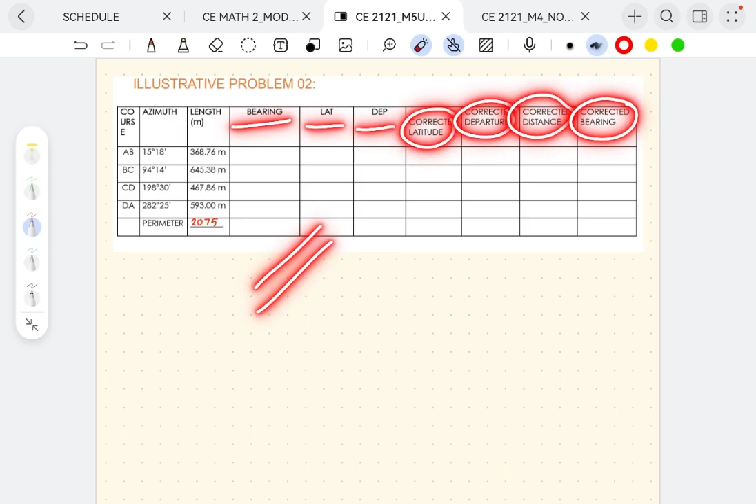The first thing we're going to do is fill up this table, identifying the bearing, latitude, departure, corrected latitude, corrected departure, corrected distance, and corrected bearing, based on the given data.

We can already solve for the perimeter by summing everything up, which gives us 2075. But before proceeding to solve, I usually like to sketch or roughly graph what is given in our data.

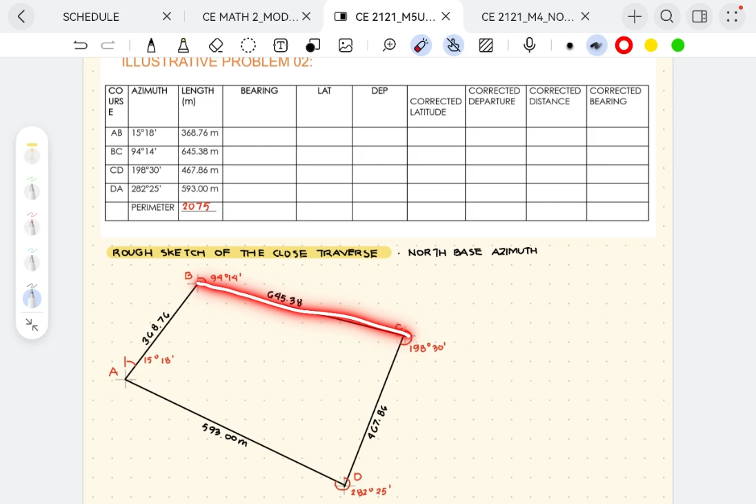We have line A to B with an azimuth from north of 15 degrees 18 minutes. Then from there, we have B to C with an azimuth of 94 degrees 14 minutes, and C to D and D to A with their respective azimuths. I've also indicated the measurement of the lines.

After roughly sketching the given data, we have to identify the bearing of each line. So what is the bearing of line A to B? Since this angle is already given as 15 degrees 18 minutes, we just need to know the direction. From here, this is north going to east, meaning the bearing for line A to B is north 15 degrees 18 minutes east.

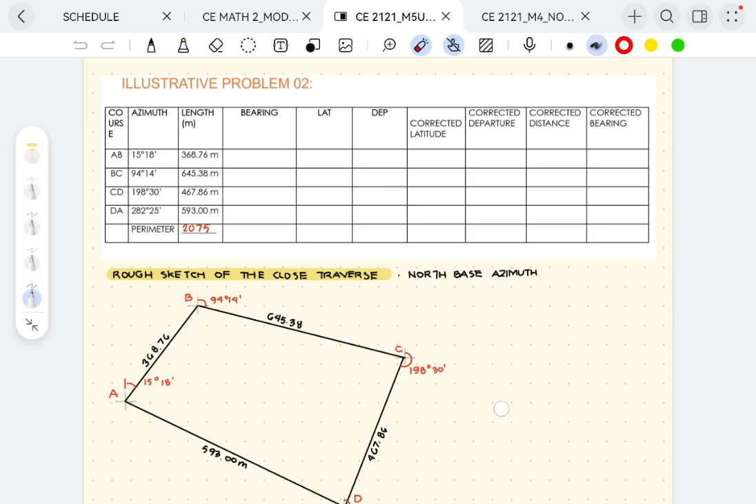This is your line A to B with a given bearing of 15 degrees 18 minutes north going to east.

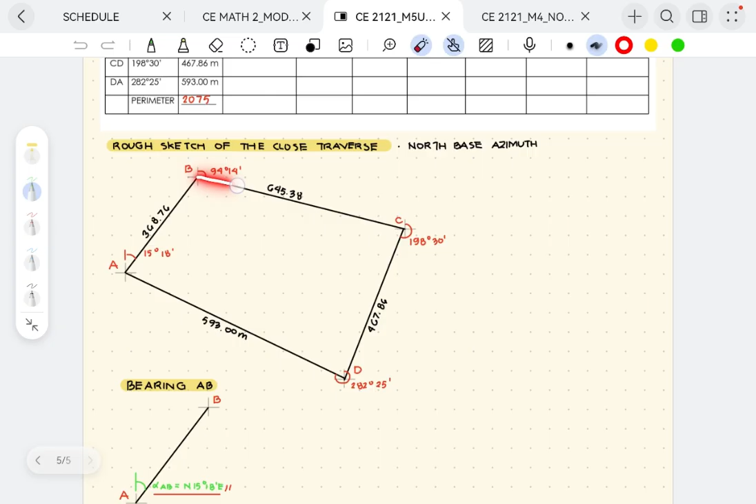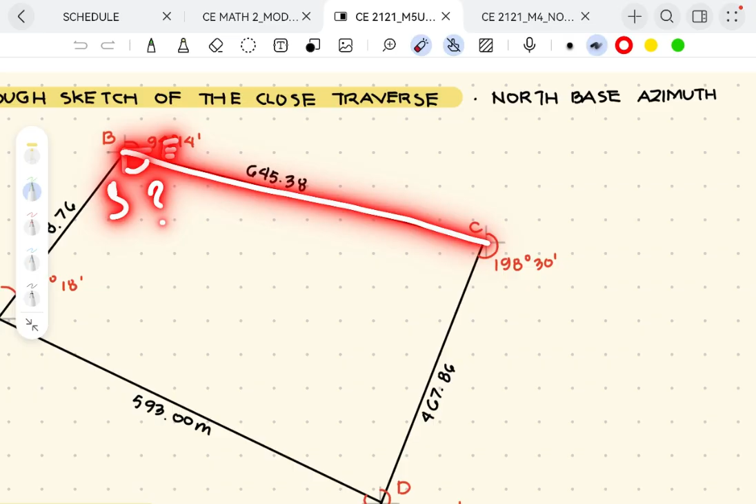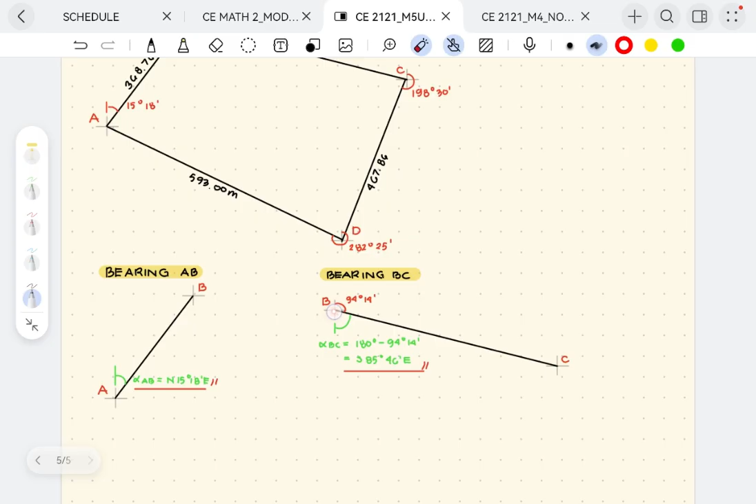Now what we need to identify is the bearing of B to C. As you can see, it is situated somewhere between south and east, so the angle should come from here. Let us make another diagram for line B to C to properly illustrate the bearing of B to C. In order to identify the angle from south going to east, we simply subtract 94 degrees 14 minutes from 180 degrees.

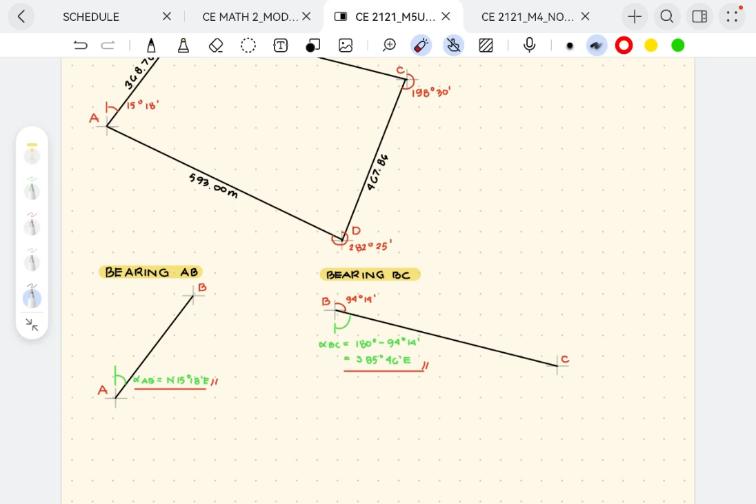So it's 180 degrees minus the angle 94, and we'll be able to solve for the angle here. The answer for bearing BC is south 85 degrees 46 minutes going to east.

For line C to D, I isolated the line again. What is the bearing of C to D? As you can see, it's already between south and west, meaning the direction for the angle is from south going to west. To identify this angle, we just subtract 180 degrees from 198 degrees 30 minutes. So the answer for the bearing of C to D is south 18 degrees 30 minutes going to west.

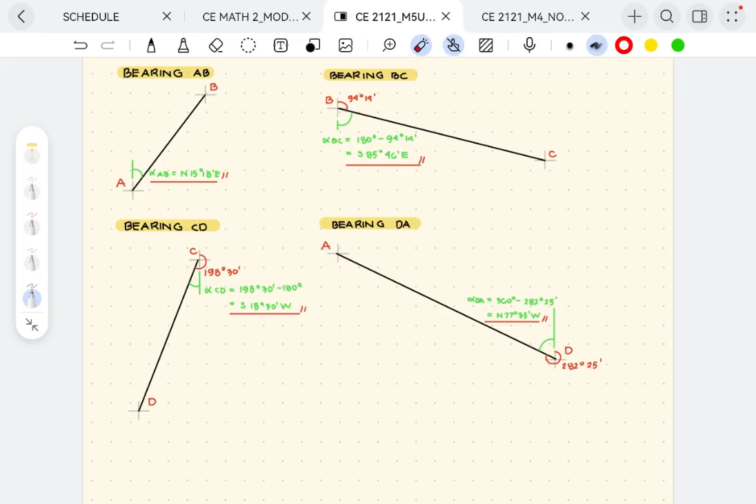The last bearing we need to identify is the bearing of line D to A. Here is your line D to A, and we need to identify this angle in order to identify its bearing from north going to west. We subtract the given angle from 360 degrees to identify the angle inside: 360 degrees minus 282 degrees 25 minutes, giving north 77 degrees 35 minutes going to west.

Next, after solving and writing the bearings in the table, we have to find the latitudes of AB, BC, CD, and DA.

So here I would make a rough sketch of line A to B first. This is your line A to B, and this is your latitude, this is your departure. Latitude is always the vertical distance, and departure is always the horizontal distance. As you can see here, we can consider this a right triangle, and we can solve for the latitude and departure using cosine and sine.

Let's first identify the latitude. If this is your angle, using cosine means we divide the adjacent side by the hypotenuse. The adjacent side here is your latitude, and the hypotenuse is 368.76, giving us a latitude of 355.69 meters. For the departure, we use sine, since sine is the opposite side divided by the hypotenuse, giving us a departure of 97.306.

The next thing we need to identify is the latitude and departure of line BC, which are shown here.

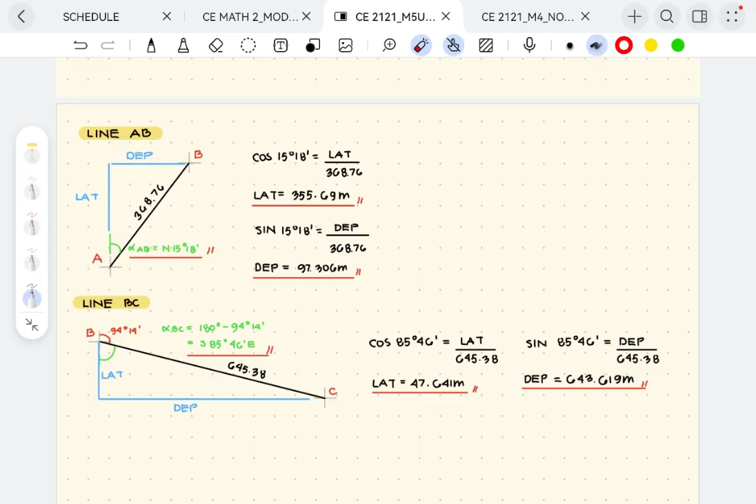To cut the video short, I've already solved for the latitude and departure of line CD and DA, still using cosine and sine, and considering these as right triangles.

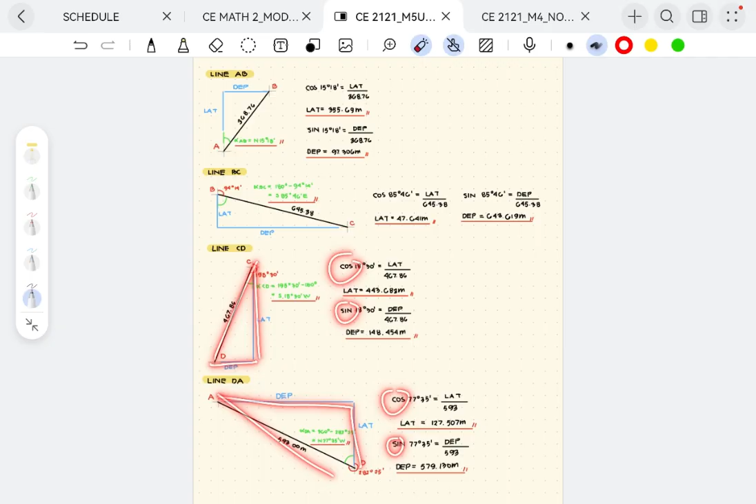After writing the latitudes and departures that we've computed in the table, the next thing we need to do is sum the latitudes and departures. So here we have 355.69 minus 47.641 minus 443.683 plus 127.507. So here we got negative 8.127.

As you can see, I used the sign convention. I included it there in the computations of the summation of latitude.

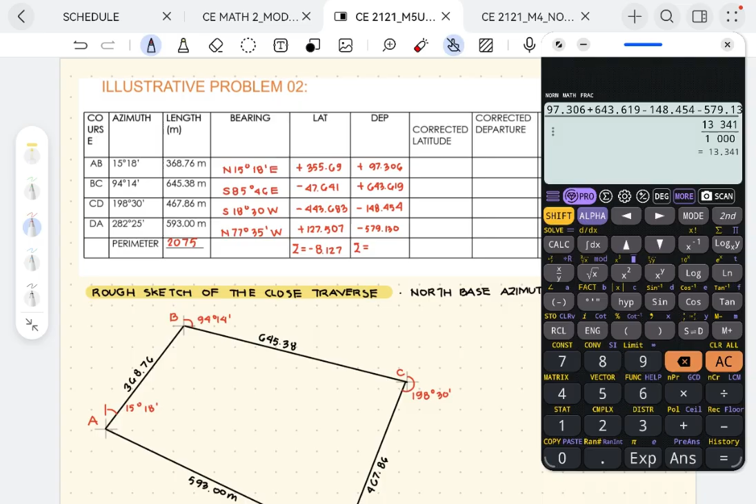Let's do the same thing for departure: 97.306 plus 643.619 minus 148.454 minus 579.13. So we got 13.341, or 13.341 positive.

13.341. So what does this negative and positive mean? The negative one means it's insufficient, the computed latitudes were not enough. Here, it's positive, meaning we have an excess in the computations of our departure, or the departure and latitude exceeded the computed lengths and angles.

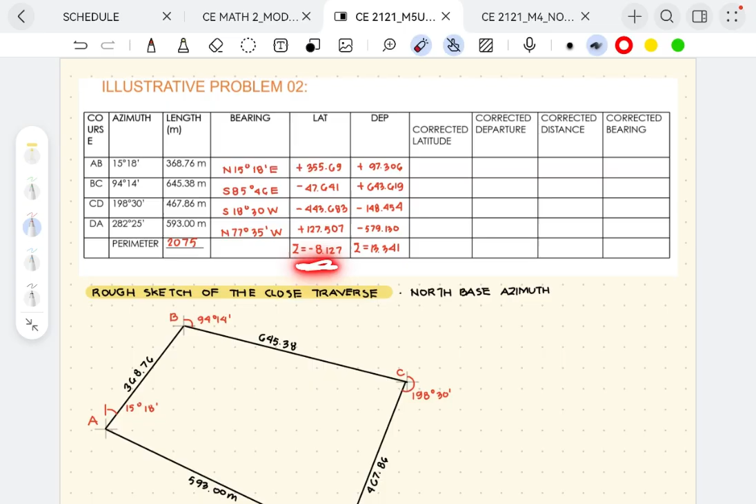Meaning to say, if insufficient, we have to add; if positive or excess, we have to subtract. Now how are we going to identify the correction, or how are we going to correct the latitudes and departures? We will use compass rule for this problem.

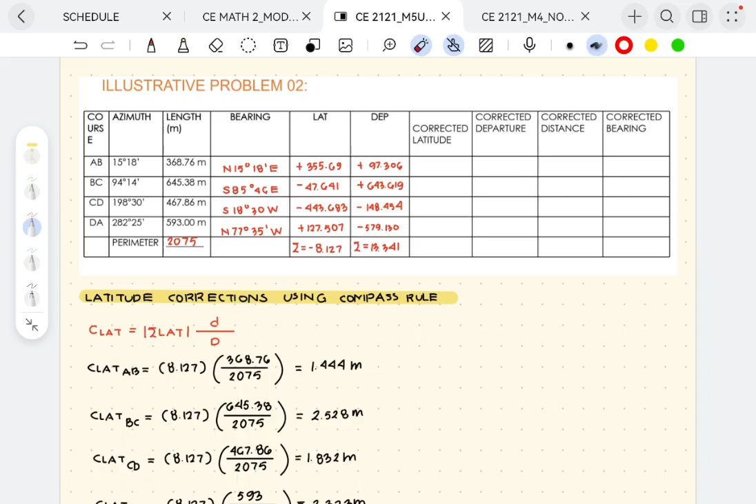Compass rule: I've already written all of the computations. The correction for latitude is equal to the summation of latitude, which is this one, taken as an absolute value, multiplied by the distance, divided by your perimeter. So here, the correction of latitude A to B is equal to the absolute value of 8.127 multiplied by your length, divided by your perimeter. This gives us 1.444 meters.

Same goes with BC, you just replace the distance here. Same goes with CD, you replace this. Same goes with DA, you just replace the value of the numerator.

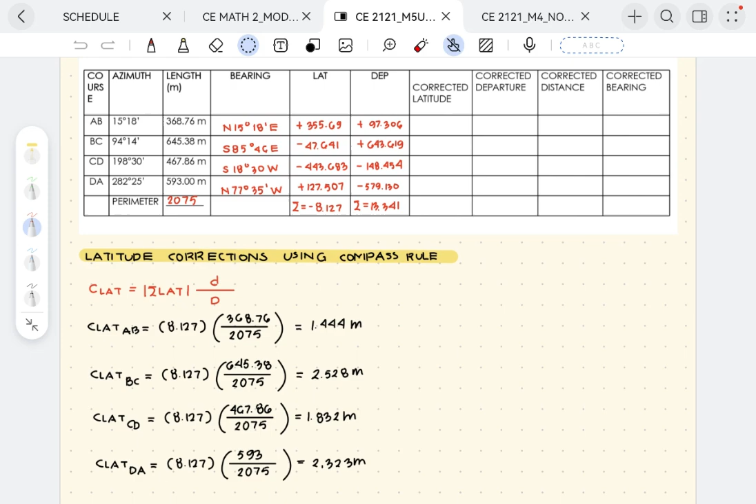Now we will be using these corrections in order to compute the corrected latitude. But before that, let us first compute the corrections for departure so our computation flows continuously. So the formula for the correction of departure using compass rule is this one.

Correction of departure is equal to the summation of all the departures in its absolute value, multiplied by the distance of the line, divided by the total distance or the perimeter. So here, the sum of all the departures is positive 13.341, as I've indicated. Multiplied by the distance of A to B, which is 368.76, divided by the solved perimeter, that would be equal to 2.371.

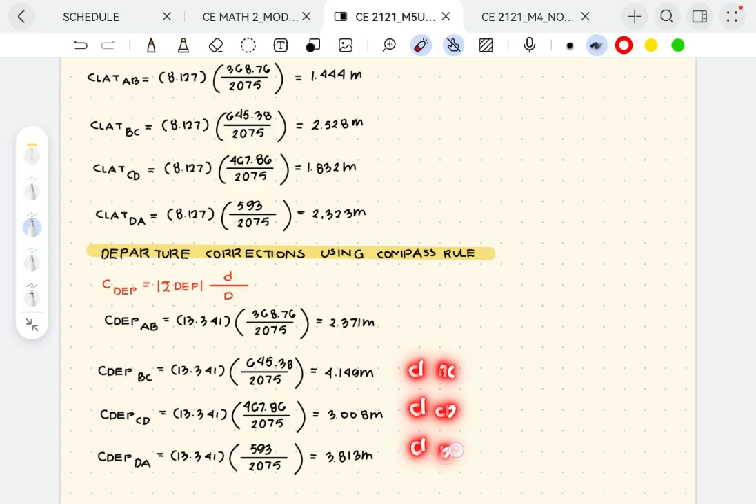That would be the same for BC, CD, and DA. We just change the value of the numerator since the distances for BC, CD, and DA are different. So these are your corrections for latitudes, and these are your corrections for departure.

Next, we have to solve for the corrected latitude. What I'm going to do here is simply write all of the existing latitudes that we've solved and apply the corrections. Recall that if it's negative, meaning insufficient, we have to add the correction. As you can see here, I added all of the corrections, giving us the corrected latitude as 357.134 for AB, negative 45.113 meters for BC, negative 441.851 for CD, and for DA, 129.83.

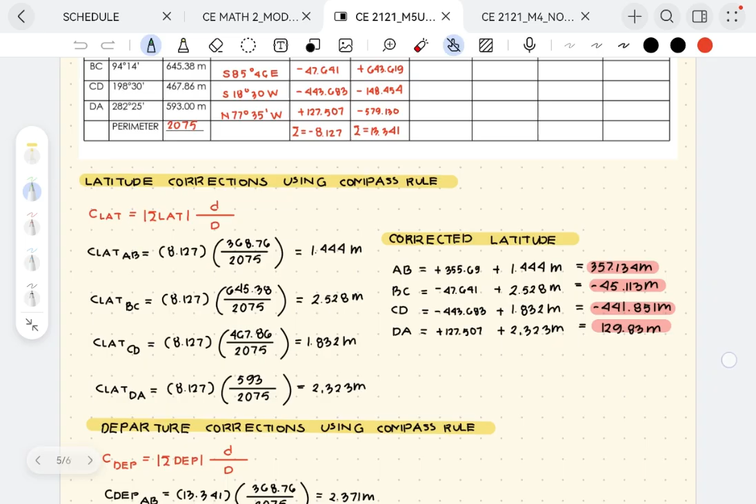So for us to know if what we did is correct, the sum of all of this should be equal to 0. Let's try: 357.134 minus 45.113 minus 441.851 plus 129.83, giving us a sum of 0, meaning the corrected latitude that we've computed is correct.

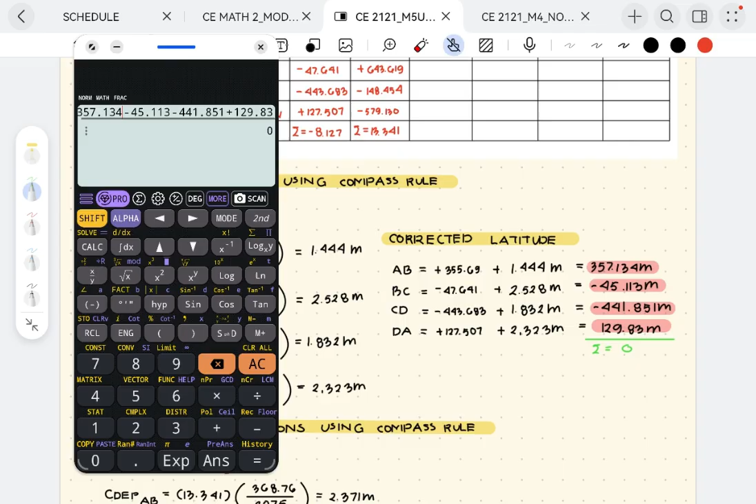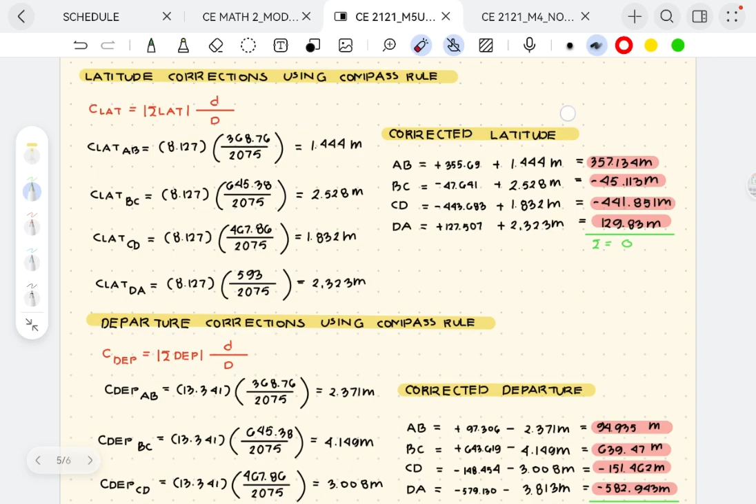Let us now proceed to computing the corrected departure. Same thing here, what I did was copy all of the departures here, including their sign convention. Take note that what we've solved for the summation of the departure is positive, meaning it's in excess. So what we need to do is subtract the corrections from the departure in order to get the corrected departure.

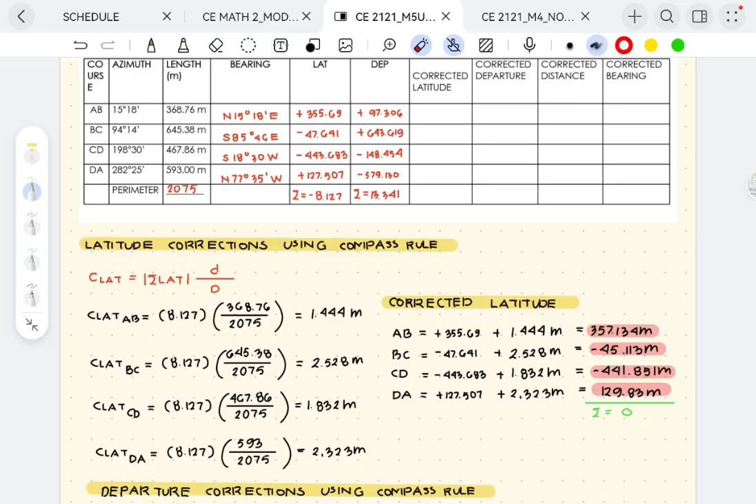Let's go back. Here, 97.306 minus the solved correction gives us 94.935 meters. So 643.619 minus the correction gives us 639.47 meters.

Negative 148.454 minus 3.008 will give us negative 151.462. And then the corrected departure for line DA, that is negative 579.130 minus the correction, giving us negative 582.943.

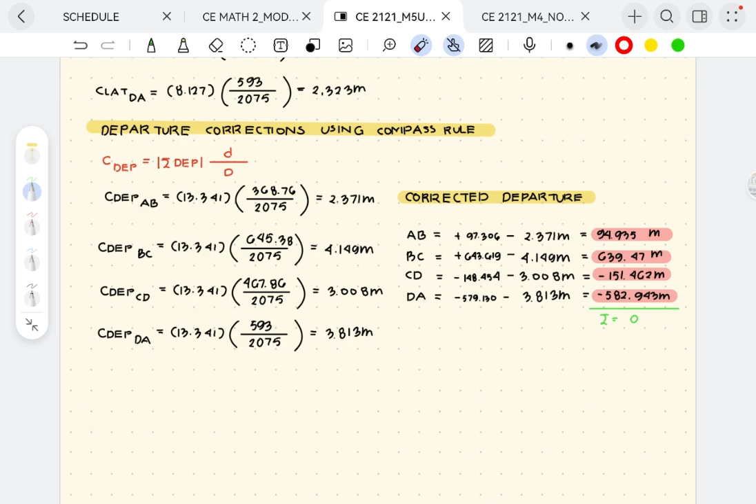Again, in order to know if tama ba yung na-compute, you sum all of this and it should be equal to 0. So after writing it down on our table, what we need to solve now is the corrected distance.

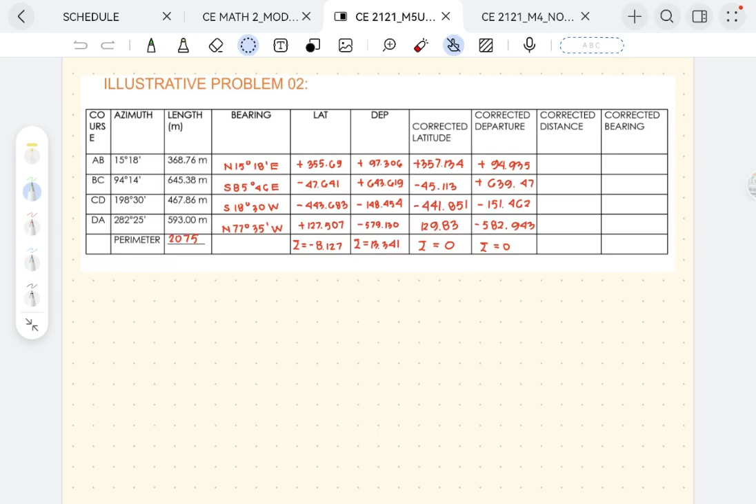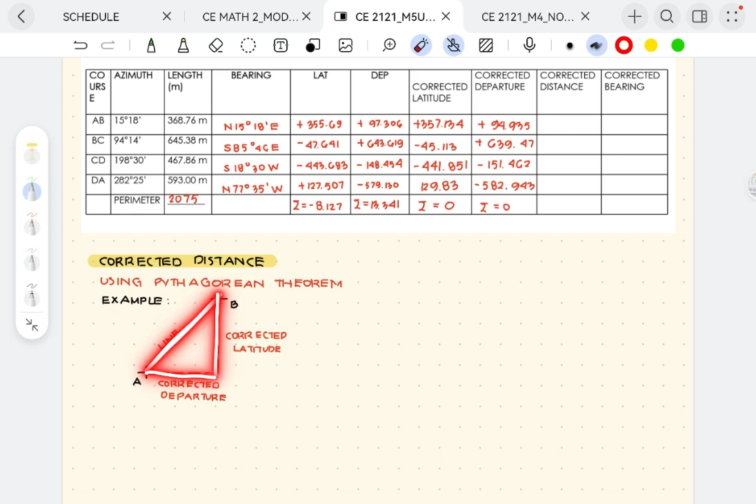What you need to know here is that what we only need to use is Pythagorean theorem. Since here, if this is your line AB, this is just an example - this is your line AB, this is your corrected latitude, this is your corrected departure. This is still considered as a right triangle. So what we're going to use is Pythagorean theorem in order to solve for the corrected distance.

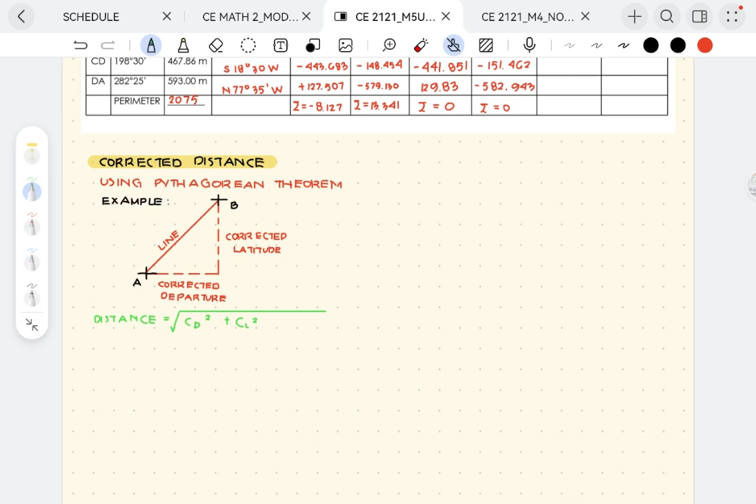And as you may know, the formula for Pythagorean theorem is equal to: distance is equal to the square root of corrected departure squared plus corrected latitude squared. So here's the formula for the corrected distance using Pythagorean theorem.

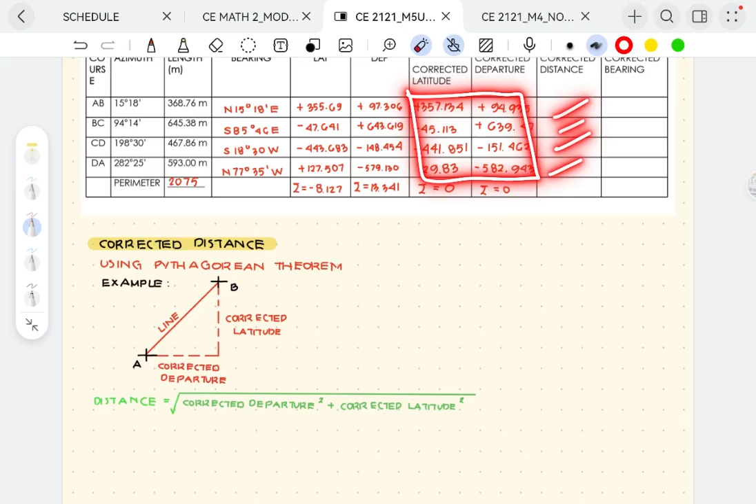Now we will just apply this to the solved corrected latitudes and departures of the respective lines. Let's just move this here so we would have space to solve. So the computation for the distance using the corrected latitude and departure is this.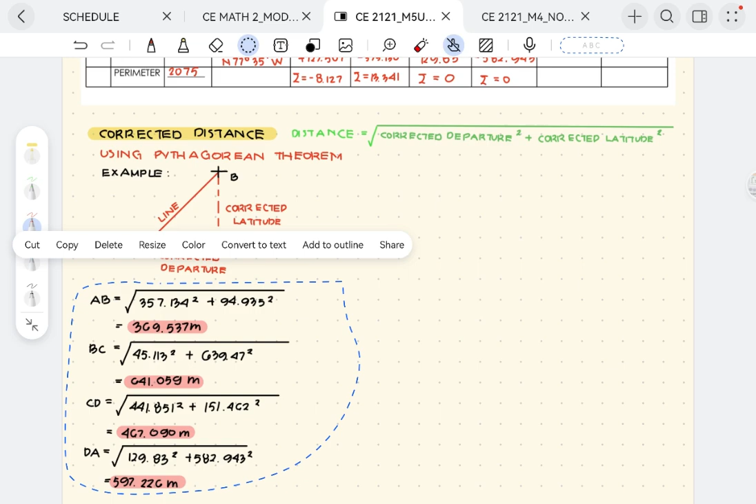For lines A to B, let's move this here. Line A to B, that is simply the square root of 357.134 squared plus 94.935 squared, giving us your corrected distance for AB.

Same goes with BC, the square root of the corrected latitude squared plus the corrected departure squared, that would give you your corrected distance. Same goes with CD, the square root of corrected latitude squared and corrected departure squared.

Now here, I did not indicate the sign convention already since negative numbers squared would always become positive. So no need to include the sign convention, but if you want, you can still include it. It is just for my simplification of solution.

So for DA, last corrected distance, square root of the corrected latitude squared plus the corrected departure squared, giving you the answer of 597.226. After writing your answer in the table, let us now solve for the corrected bearing.

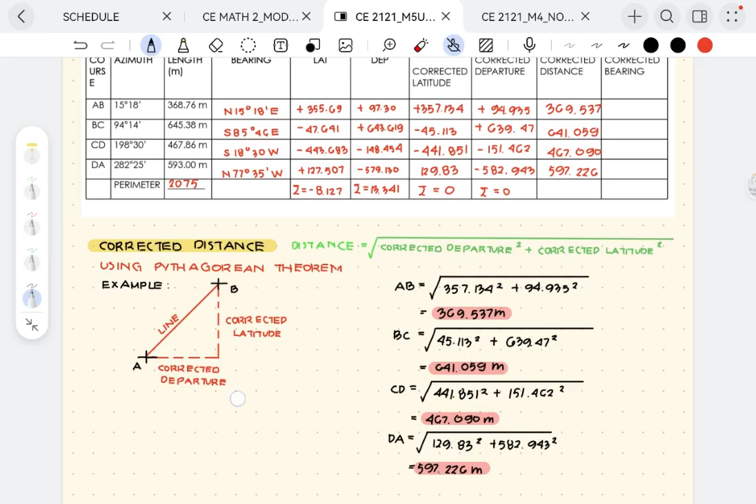And we can solve for the corrected bearing using tangent. If this is your bearing and you want to solve that angle, or the corrected bearing, we need to use tangent alpha. So tangent alpha, as you may know, that is equal to opposite side divided by adjacent. Let's just move this a bit lower.

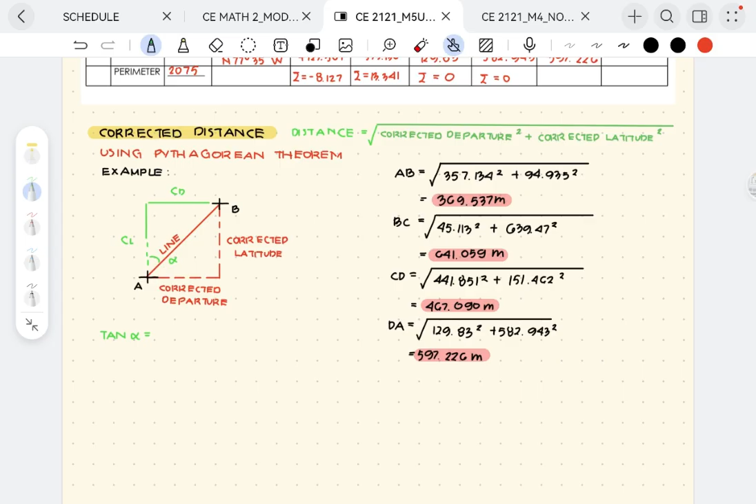This is your corrected departure, this is your corrected latitude. Now, in order to solve for the bearing of the alpha, or the angle alpha, what we need to do is use tangent, meaning opposite side divided by adjacent. So your opposite side is corrected departure divided by your corrected latitude, which is your adjacent. And this should be in its absolute value.

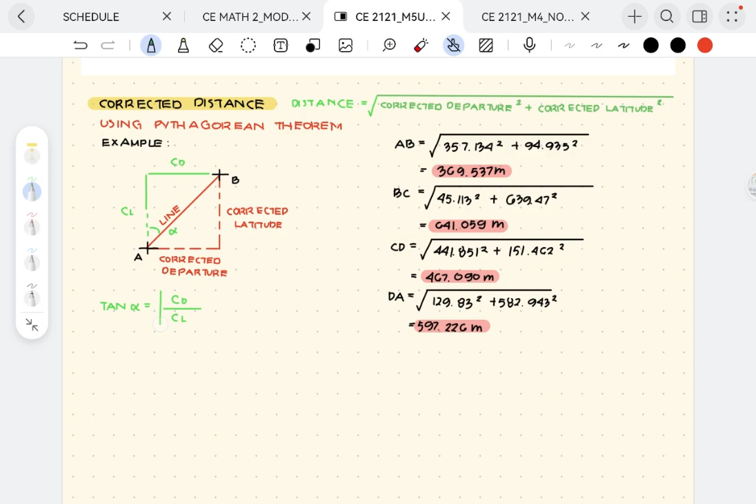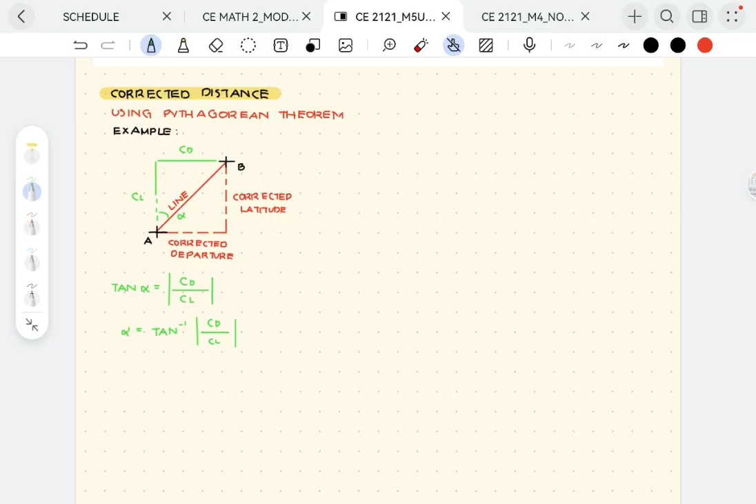For the bearing, let's just simplify this para direct na sa calculator: CD over CL. So alpha, or the bearing, is equal to arctangent multiplied by corrected departure divided by corrected latitude, since we're going to consider this as a right triangle. So here's my computation for the corrected bearing.

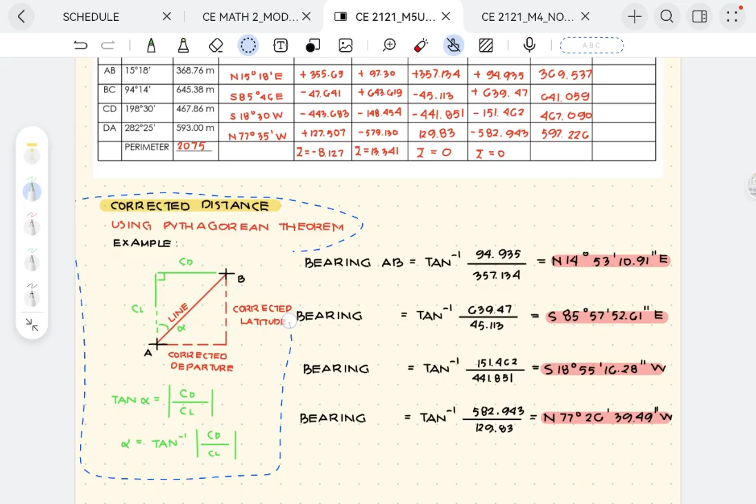Let's just write that here, move this a bit to the left. For bearing AB, I solved that using arctangent multiplied by 94.935 divided by your latitude, giving you an angle of 14 degrees, 53 minutes, and 10.91 seconds.

So it's like this: arctangent of 94.935 divided by 357.134, giving you an angle of 14.886. This is in decimal. We need to convert this into its degrees, minutes, and seconds by pressing this button. There, 14 degrees, 53 minutes, and 10.91 seconds.

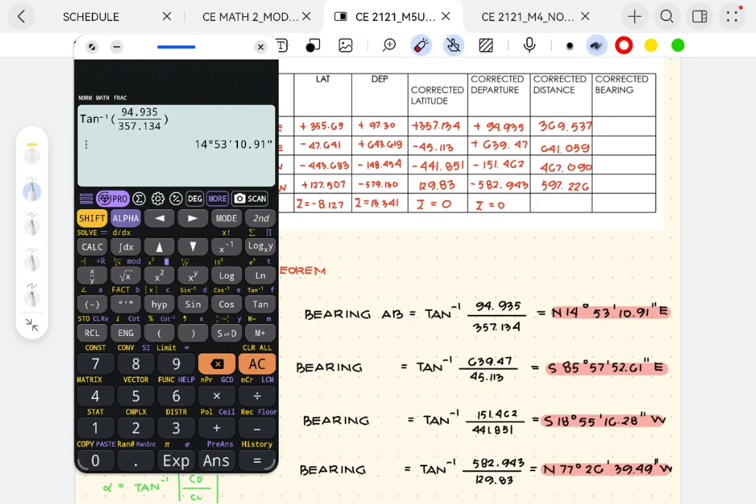As you can see, my directions did not vary, it's still north going to east. Same goes with bearing BC, CD, and DA. We have arctangent 639.47 divided by 45.113, giving us an angle of 85 degrees, 57 minutes, and 52.61 seconds. Same direction pa rin, south going to east. For CD, ganun pa rin, and for DA, ganun pa rin. Same thing.

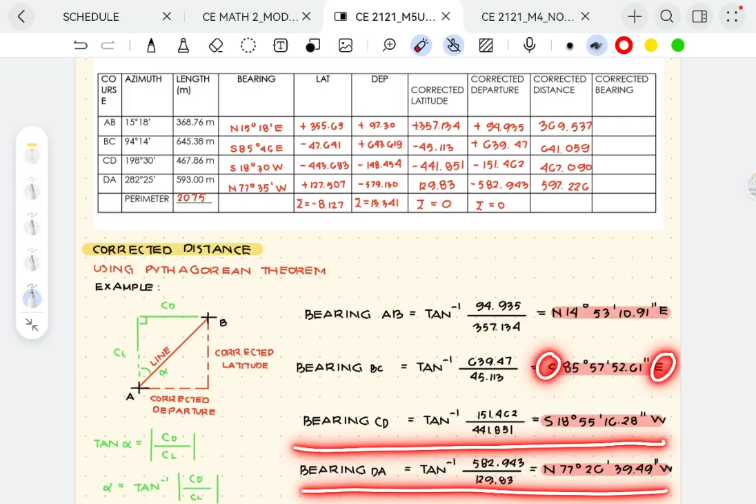After solving this, let's put it inside our table. Now we've completed our computations using the compass rule.